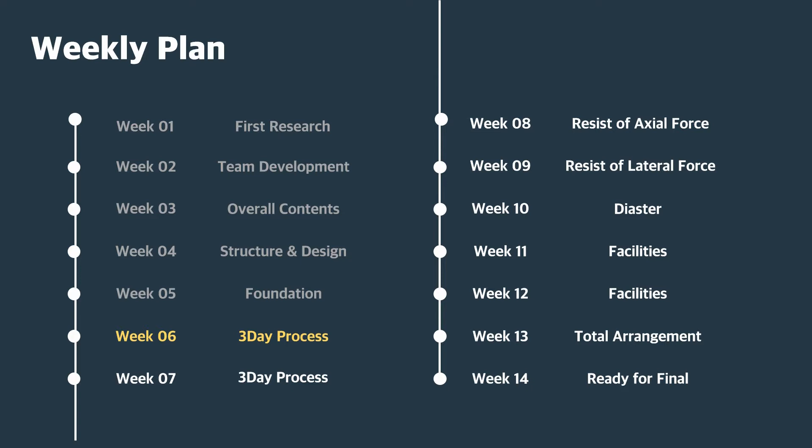Last week we presented about the foundation, and today we will present about the 3-day cycle. Before starting the 3-day cycle, we will summarize the foundation presented last week.

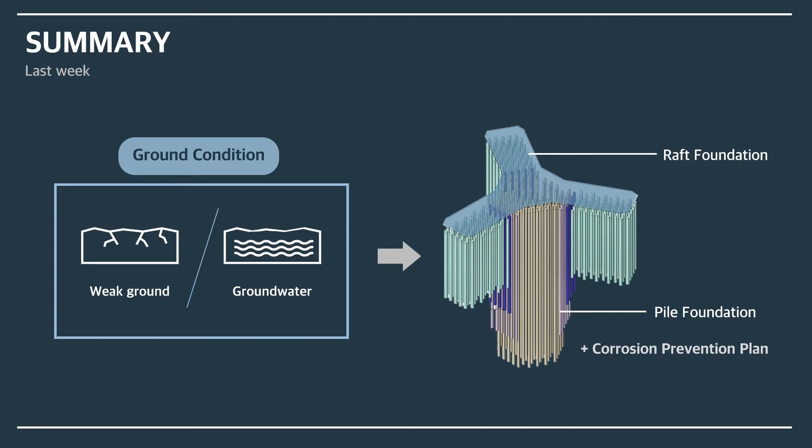Dubai, where the Burj Khalifa is located, had very weak ground and a risk of contact with groundwater. A more economical and stronger reinforced pile foundation was used to solve the weak ground problem. In addition, many technologies such as the tremie method, addition of corrosion inhibitor, and cathodic protection system were used to prevent corrosion by groundwater. This foundation became a strong foundation after many tests.

Why did this building need a 3-day process? Before entering the whole story, Burj Khalifa is an 828-meter building. To build it, they needed a lot of manpower and machines, so it was a project that had to be completed in a short period of time. The most important thing in the construction project was time, which is why Samsung C&T was chosen as the construction company.

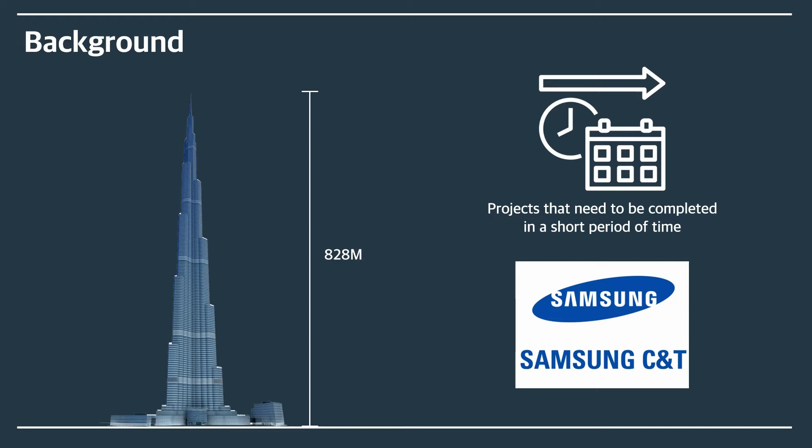The Petronas Twin Towers, located in Malaysia, were uniquely constructed by one Japanese construction company and Samsung C&T. Originally, to build one floor took 7 days, but Samsung C&T succeeded in shortening the construction time to 4.5 days. To make this method a success, concrete pumping technology and tower crane handling technology were used. This was the most important reason for completing construction quickly, proving the highlight of this technology worldwide, and leading to Samsung C&T taking charge of the construction of Burj Khalifa.

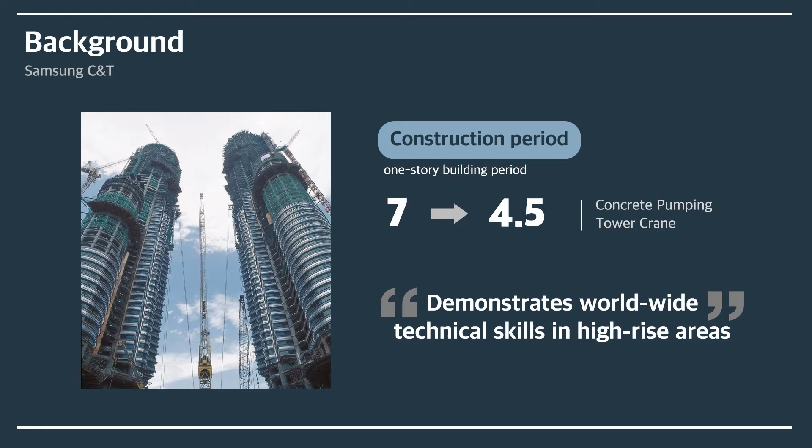We will explain the 3-day process, which is even shorter than the Petronas Tower example we showed. Various technologies were used to shorten the construction: Day 1, prefabricating steel bars; Day 2, assembling and molding; Day 3, pouring the concrete to construct one floor. We will explain more details after this slide, step by step.

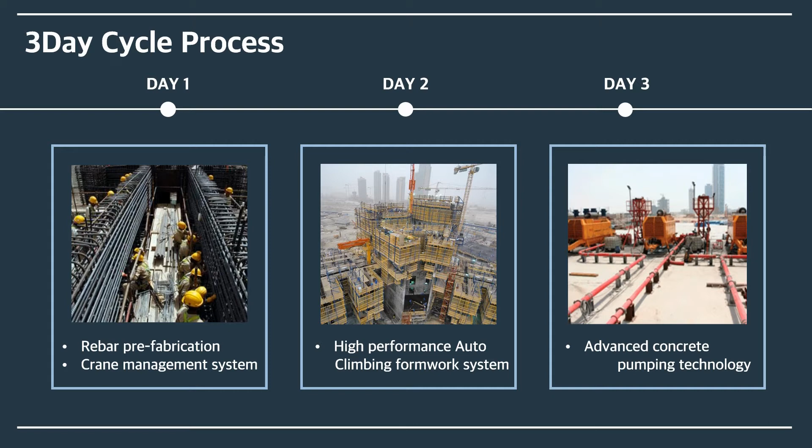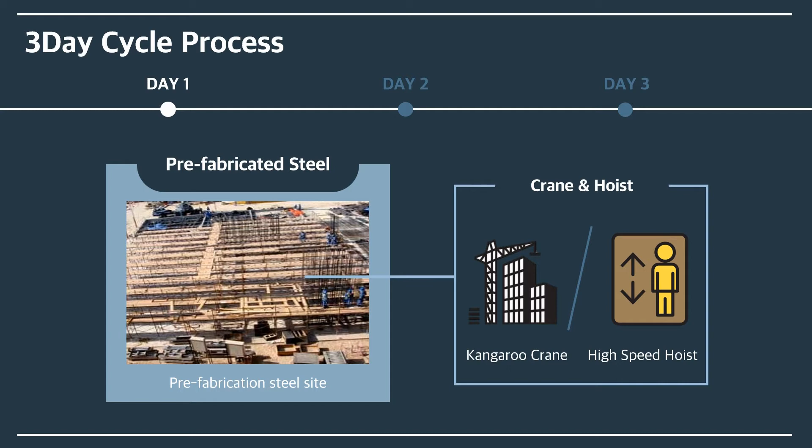First, in day 1, a rebar prefabrication technique was used. To apply this technique to Burj Khalifa, we needed smooth weight control. Accordingly, a high-speed, high-capacity crane called the kangaroo crane, along with hoists, were used. First, the prefabrication system was applied to the core walls, wing walls, and nose columns, which are the main structures of Burj Khalifa.

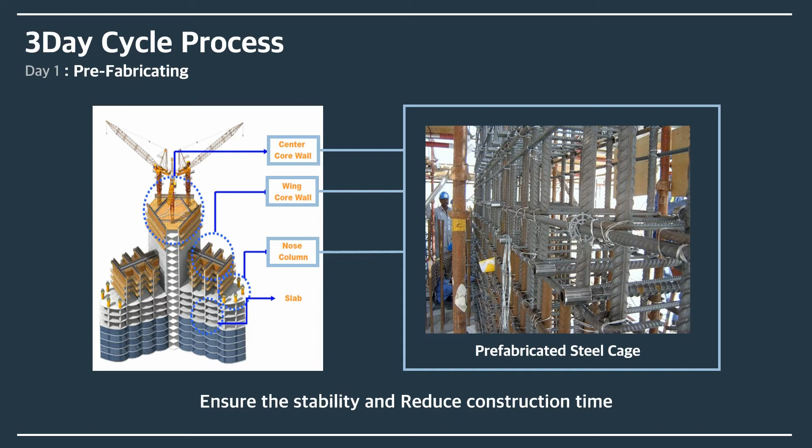The prefabricated steel cage was moved through the crane to its respective work area. As a result, quality was managed on the ground in advance, and the number of people going up the tower was minimized, ensuring stability and reducing construction time. Moreover, whenever possible, the rebar was assembled in double-story modules to speed up vertical element construction time.

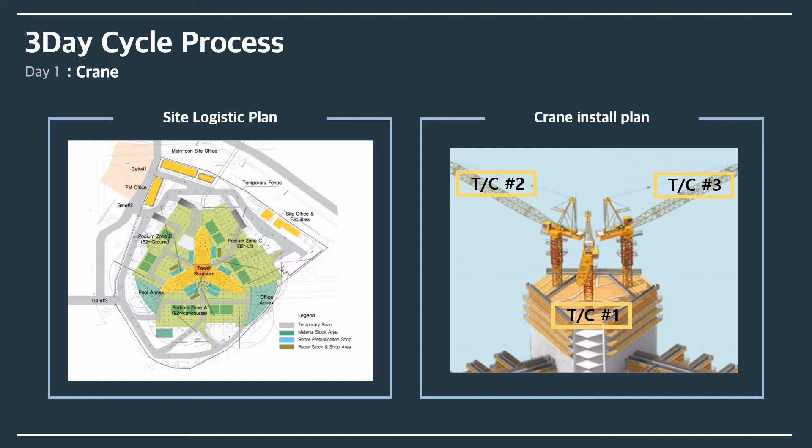Since the crane was used in a high-rise building, it was necessary for it to climb as the building was constructed. I will explain the contents while we watch the video in the next slide.

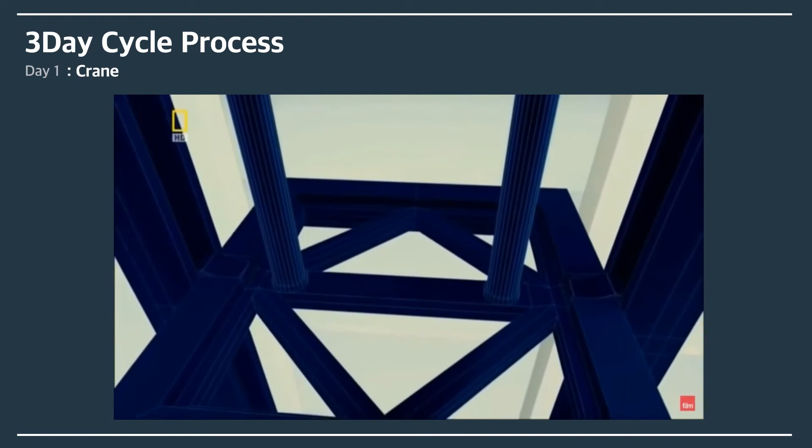Let's see this video. Once they prefabricated 3 floors, the bottom of the crane released the slip-up screws and locked back into place, and then the whole crane jumped itself to the next level. People call it the kangaroo crane because of its appearance. It was also used to build the twin towers.

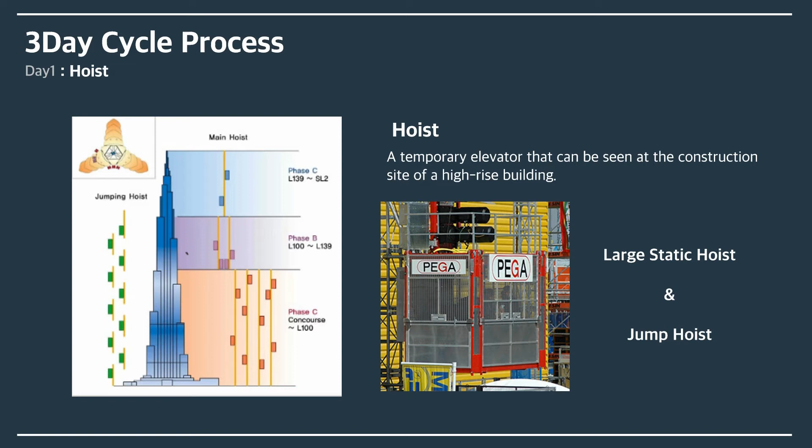Next, hoist was used. Hoist is a temporary elevator that can be seen at the construction site of a skyscraper. Two types of hoist made by PEGA company from Czechia, large static hoist and jump hoist, were installed in order to efficiently transport workers and cargo.

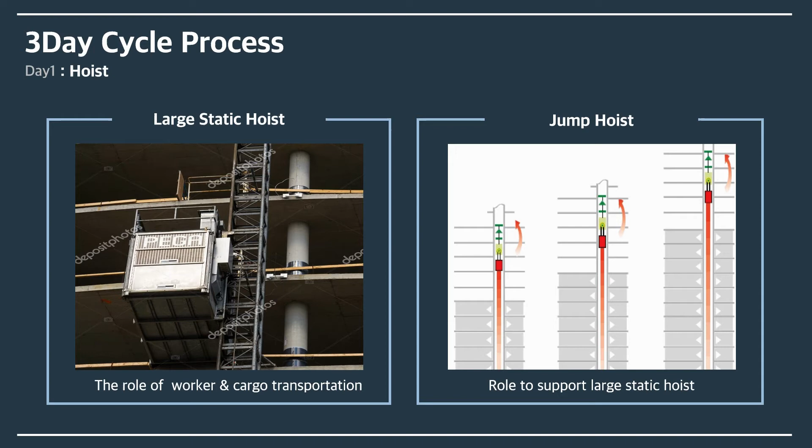Let me see more details. Large static hoist mainly acts as a transportation of workers and cargo to each work area. The other jump hoist was installed to support the large static hoist. Therefore, the jump hoist stretches as the building gets higher.

From this slide, I will present day 2 process. The techniques used in day 2 process include Doka self-climbing formwork, the installation of steel frames, and MEP. First, let's look at the formwork system.

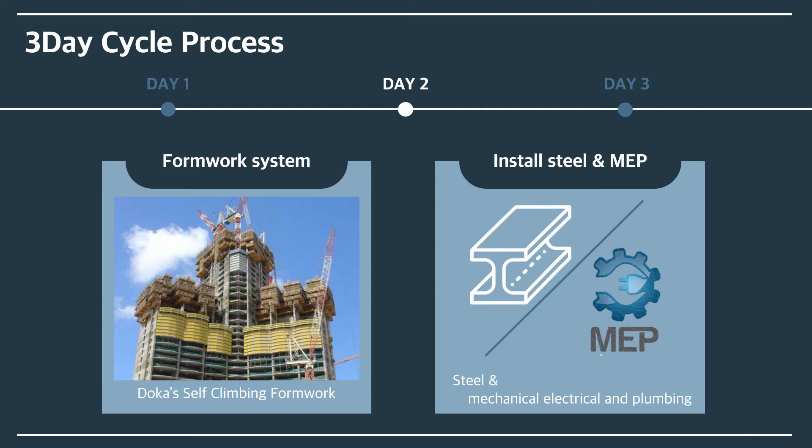High formwork platforms like SKE 100 for heavy load. It endures heavy weight. It has flexibility and cost effectiveness as well as faster circulation speeds. Construction kit can be used for a wide spectrum of use. Flexible cycling can obtain highly cost efficiency.

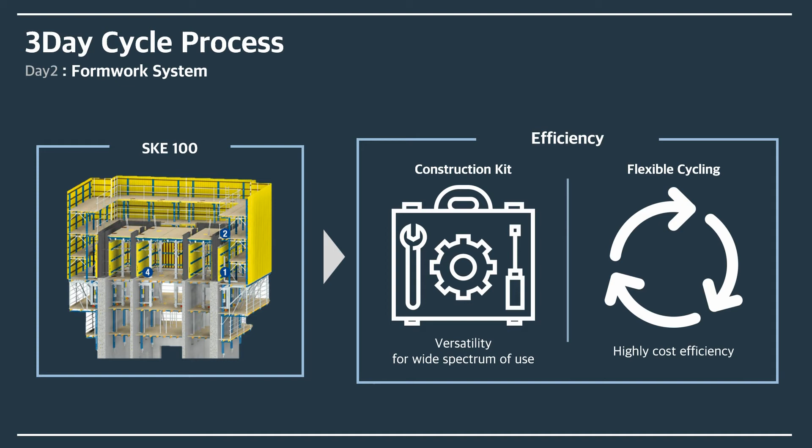The SKE is flexibly adapted to the structure, angle, and designed for climbing a large number of units at the same time. In this video, you can see how SKE works. Release the rail arms and the rail climbs step by step.

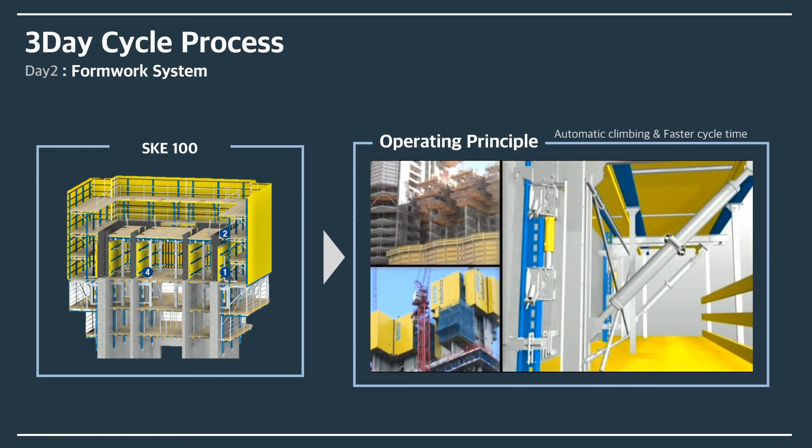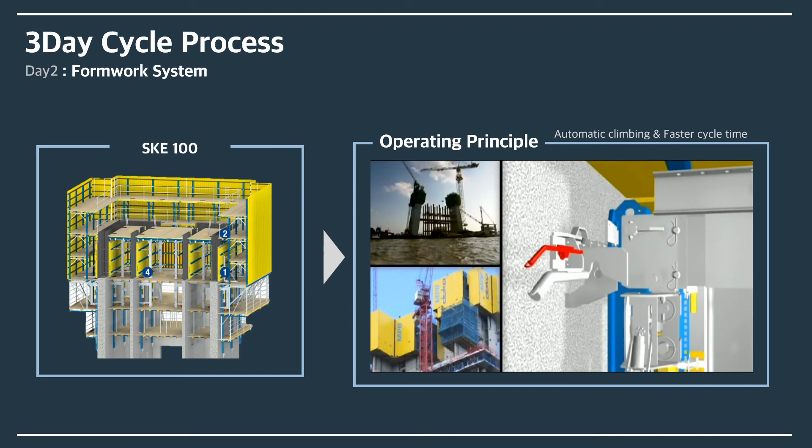And locked in next climb anchor. Formwork climbs step by step. Fix the bearing pin and lock the formwork. Position the formwork.

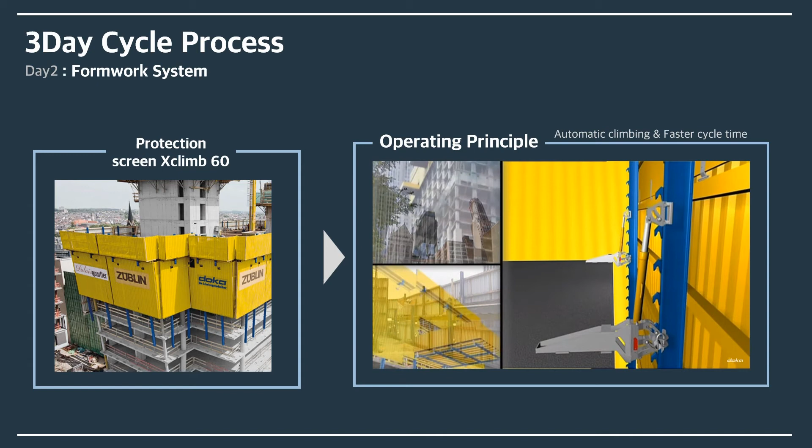Next, we will learn about the types of protection. First, polycarbonate inlay. It is translucent, wind impermeable, non-see-through, and provides natural lightening of enclosed area. And by not wind entering, it can provide stability.

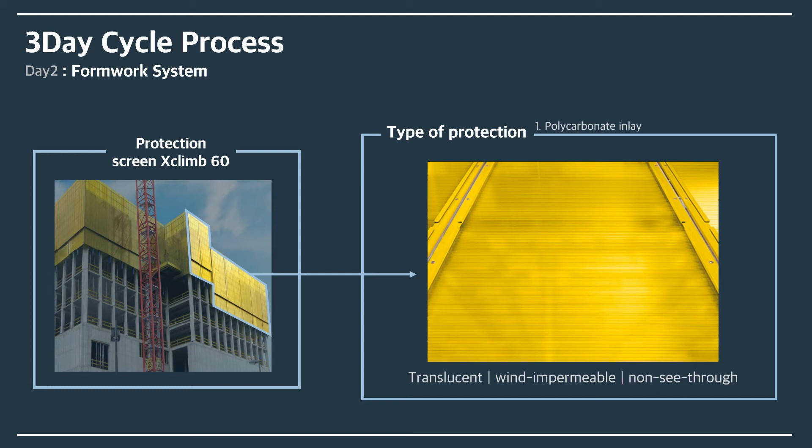Second, trapezoidal metal sheet. It is wind impermeable, non-see-through. The protection screen can be dimensioned very flexibly. All gaps are closed off to prevent any tools or other small item being dropped, which increases the standard of safety further.

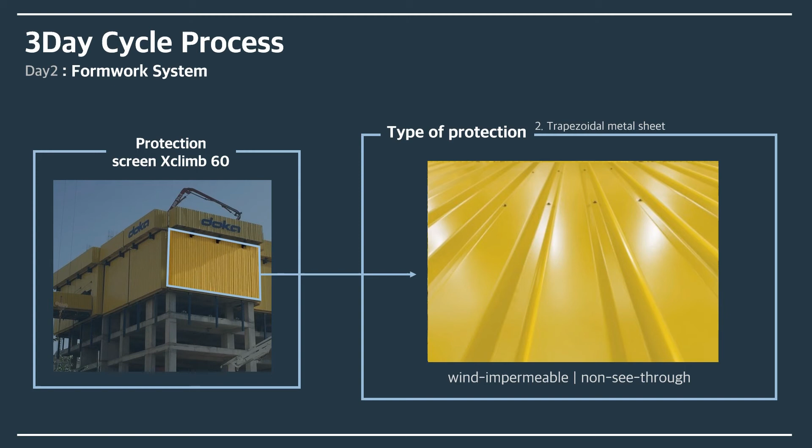Next, let's look at second construction of day 2 process, installation and MEP. This is a process that takes place after the mold is installed and before pouring concrete. So let's see the installation process first.

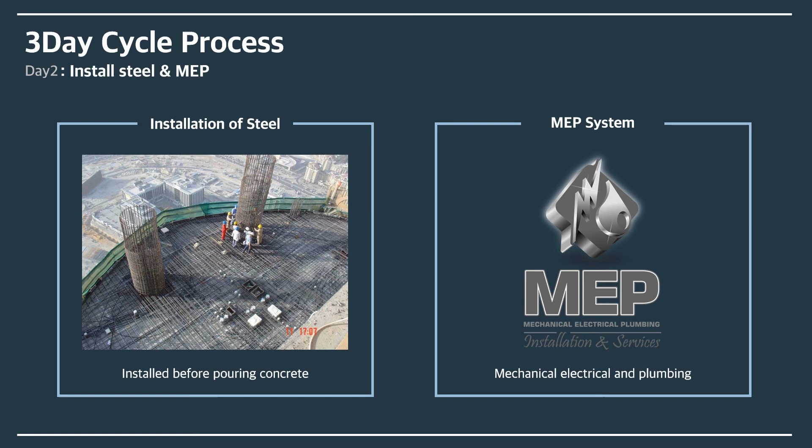In installation process, steel cages and composite link beams were used. Before pouring concrete into the formwork, lift the steel cages from day 1 with a tower crane and insert it between the formworks. The link beams were used as means of transporting and equalizing the gravity loads between the vertical members. Because the link members are subjected to large shears and bending moments, many of the link beams were composite members.

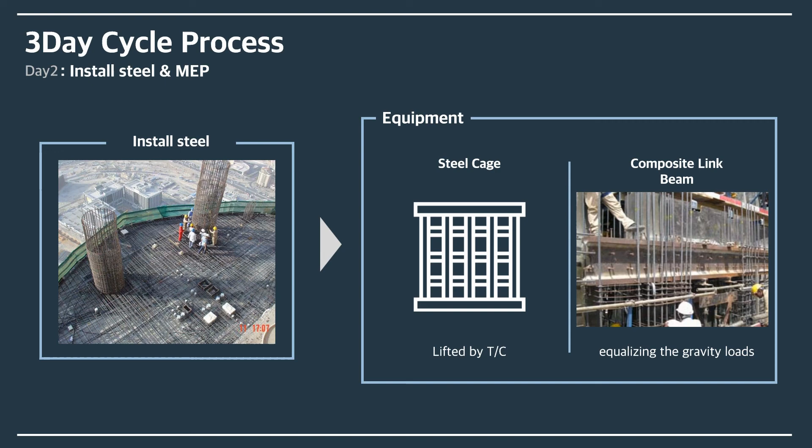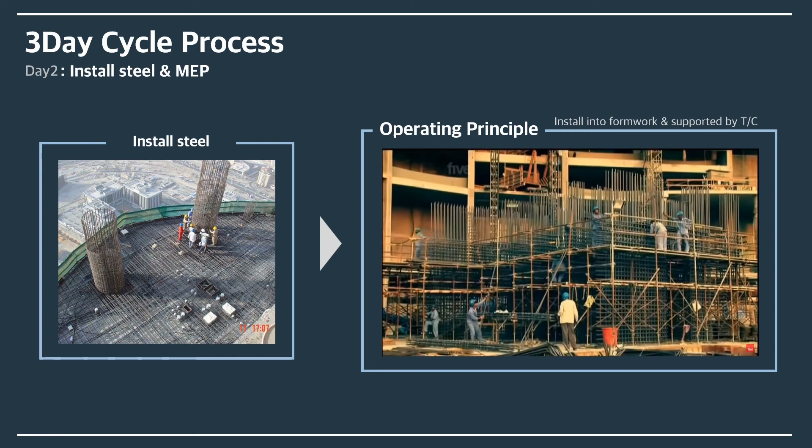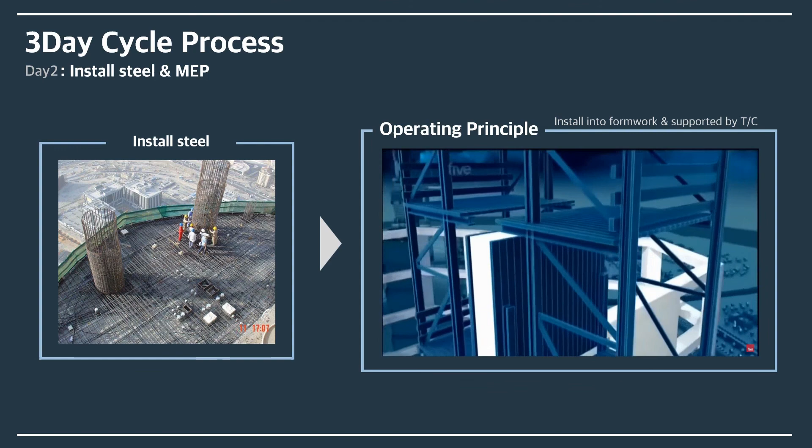In this video, you can see the installation of a steel cage. Steel workers assemble steel cages which will become the backbone for the floors and walls of Burj Khalifa. The kangaroo cranes hoist the steel cage up and install it into the formwork. In goes the concrete, and 12 hours later, when the concrete hardens, the formwork gets ready for the jump.

Next, we will learn about the MEP system used in Burj Khalifa. M is mechanical, E is electrical, P is plumbing service of Burj Khalifa. The MEP system was developed in design stage with the cooperation of designers, structural engineers, and other consultants. Also, the MEP system was installed at about 30-floor intervals.

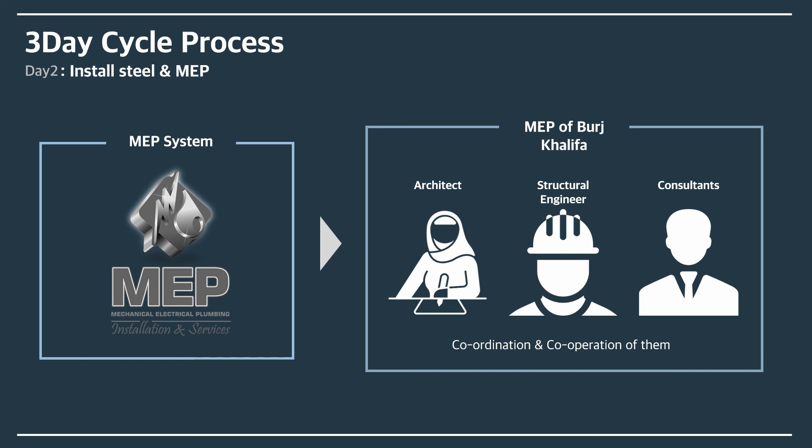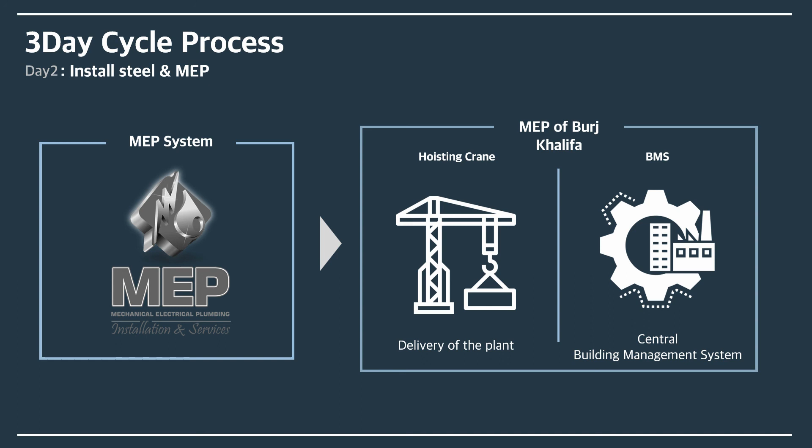Delivery of the plant to upper levels of the building is carried out by hoist and lift. MEP systems are located at intervals of 30 floors, typically covering the 15 floors above and the 15 floors below. A central building management system BMS oversees the MEP system operations throughout the tower. All MEP systems were connected to the BMS, which is used to control and monitor all service distributed all around the building.

On day 3, the process of pouring concrete. This technology is a very important factor in the progress of the project because it is the most effective in reducing the construction period. We need this technology to pump concrete up to high heights, and it was also very important to mix it to be easy to carry.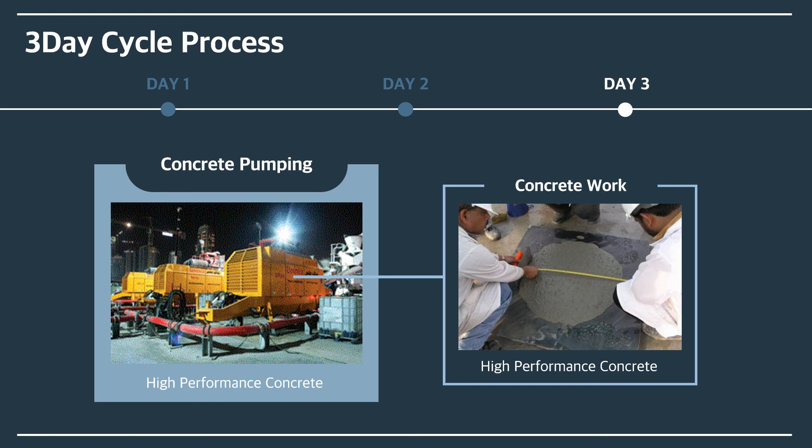The Burj Khalifa could be constructed in a short period of time with one floor on a 3-day cycle. We will present more details of day 3 construction next week, including the concrete pumping system used on the 3rd day, conditions taken into account when mixing concrete, test, and curtain walls.